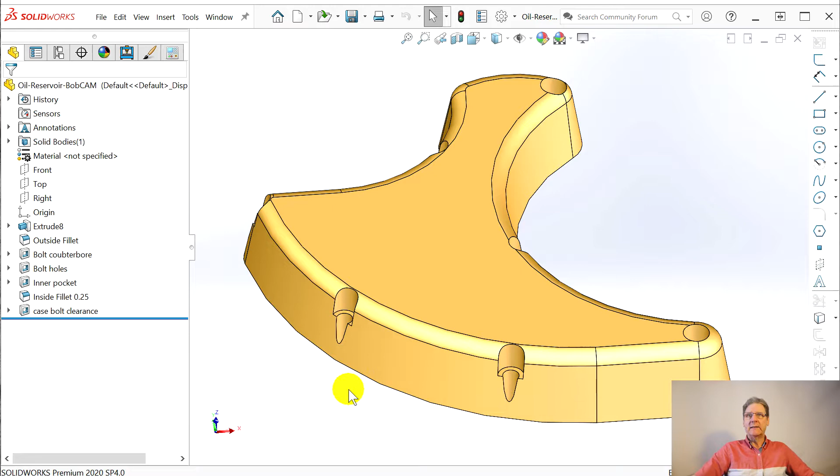And what I did is I took it and on the extrusion I put a 10-degree slope, so that there's a nice slope surface for all these good 3D toolpaths, which broke out all of these holes, but I figured let's leave those and just see. And sure enough, like any program that's trying to automatically help you with anything, it screws up BobCAD. It doesn't quite realize. It won't deal with counter bores when they're partial like this. So we'll go around that.

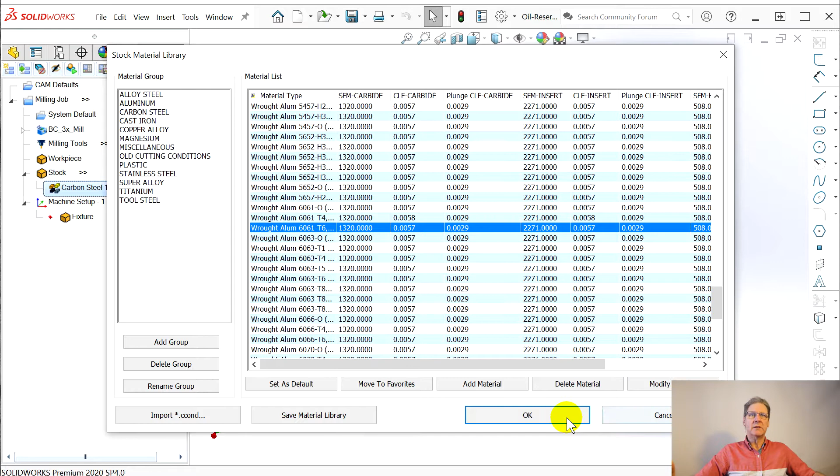Let's see, what are we going to start with? First, we'll go over to the SolidWorks tab. We'll go New Job. This is all okay. And Solid Body, what are you going to make? This thing. Stock, I noticed you can set the material right away. And it's got a pretty nice dialog box here. We want wrought 6061. And this might be a mistake because 6061, even 1.5 inches thick, is rolled in a rolling mill.

And there's a lot of stress in the top and the bottom, and when you carve that off, the part can tweak. If not 6061, there's cast alloy and various cast aluminum things made for mold making and stuff like that that don't tweak but they don't have the properties of 6061. Not that an oil reservoir needs any kind of super properties. So let's go stock wizard. I have all kinds of problems with this. So we're going to do the outside first.

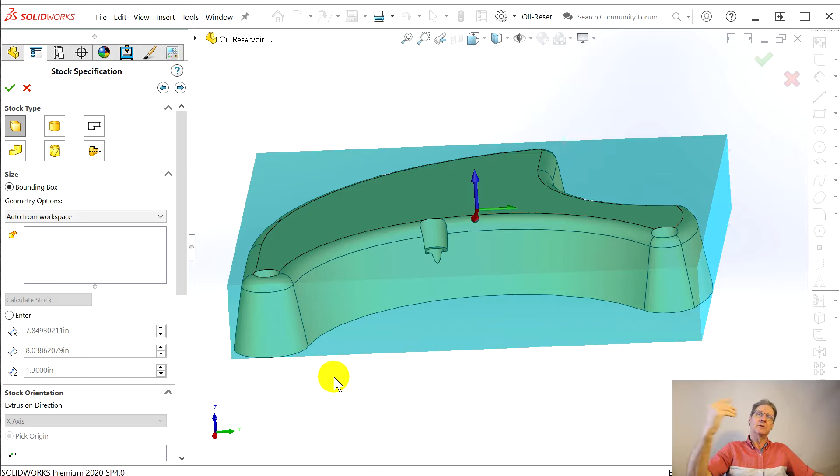One of the problems I found with BobCAD is it won't let you move setups around. You can't just drag stuff. It's like it was designed before drag and drop, before Macintosh. So you can create a new setup and then copy, paste, but then it loses all the geometry. It got to be quite clumsy. And that came about because at first I was doing the underside, this hollow part, and then the top. Now I've changed it around. We'll see if you folks agree this is the right way to do it.

Bounding box. This is given the sizes of the box, but you don't order stock like this. I'm going to order stock 8.5 by 8.5. And I'll order plate that's 1.5 inches thick. Now here's a goofy thing. It puts, let's get the icon. There's a fancy name for that. What is that? What are we trying to do? This thing.

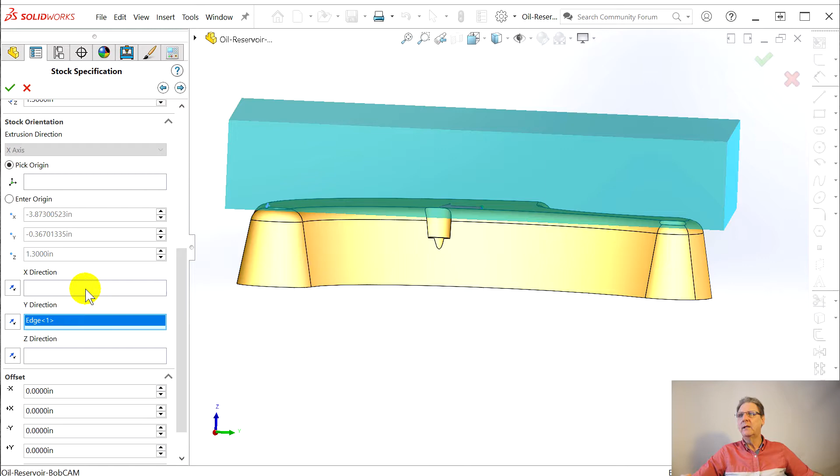Unfortunately, this can get tricky. See, the only linear thing that lined up happened to be these edges here. So if I go like that, puts Y along the right way, then here, see, this is where stuff starts going bad. Edge 1, and then I got to do Z flip, and everything goes back to normal. It freaks me out. I just don't know why getting a part 0 can be so darn complicated, right? Just leave stuff alone. And this is all the programs, right? I'm not pleased with any of them.

Okay, but it's flush here on the top, and we want a little meat. Now, I had a 1/10, but you'll see why I've decided to just put 50 thousandths on the top. When I hit enter, you'll see it jump up. See it jump, but the bottom didn't jump up. It's very confusing. So now the stock is 1.55. So you got to go here and make this 1.45. Enter, and you see it jump up.

Now it's 1.5 inch stock with the part positioned where we want it. I don't put the part 0. Well, you can't right now. Just get it oriented. I figure orient the stock with the machine the way it's going to be in the machine.

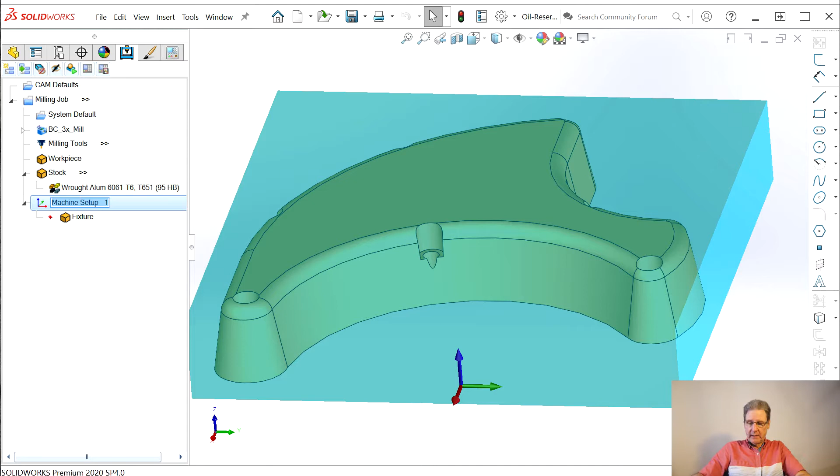Machine setup 1, let's rename it. You didn't see it at the bottom of that dialog box. And this is the outer setup. We're doing the outside of the part. Outer setup, no fixturing. So let's do mill facing. We're going to face this.

I used to just do a pocket so I didn't have to face all the material. Don't pick any geometry because you want it to do material approach. Let's see if it's smart enough to figure this out. Machine strategy, just facing. That's cool. Posting we don't care about. Rough. It's a 1/2-inch tool. I don't have 1/2-inch tools. Let's use a rough end mill.

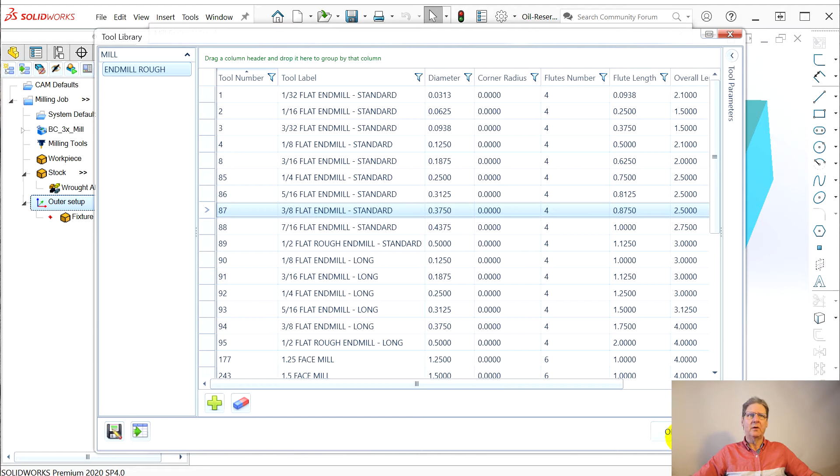And I always have trouble with this dialog, what it's doing to me. I want a 3/8-inch end mill. Okay. There it is. And you'd think, okay, we're not using the flat. Well, see, it thinks it's still using it, even though it's not. Then you go here, but I don't have a 4 flute, and I can't find a way to change it from high-speed steel. So that's kind of annoying.

It has to be longer. Let's make it 1.5. And the overall length will be at least 3 inches. And the protrusion out of the collet will be 2.5.

So 3/8. I did learn you set the units in the SolidWorks options document units. Put 4 units, and then you see all the 4 here. Otherwise, it'll pick up from SolidWorks. You'll just have 2 significant digits. I think we're okay here.

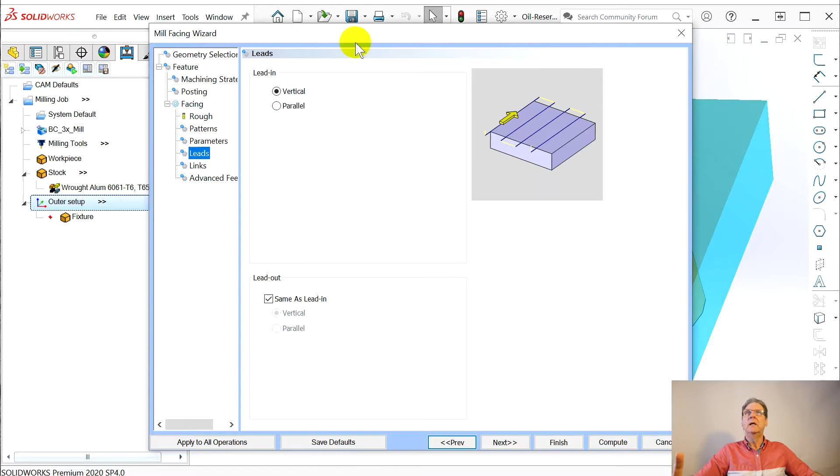Next, patterns. We want to do adaptive because I want it pretty, right? Because this is the outside of the part. And adaptive's a really cool thing that they offer. I don't think any allowance. Was there anything in patterns? I don't think so. Lead in. I'll pull it off here and hit compute. We should see it do its thing. It's got to think. It's a complicated toolpath, so this dialog comes up.

And there it is. And the reason I'm machining all of this stock is when I flip it over, I want the part and the stock to be flat on the table. Before I was pocketing this out, and you'll see why that's going to be a problem. When I break the part out, it'll fall 50 thousandths, which might just tilt it and gum up the gasket surface we're going to be doing.

But this is cool, right? We're happy. So we can go click, click, wait, click. Oh, I'm on the stock. That's what's going on. So we've blanked the toolpath, so we don't got to worry about it. So we've faced it. The next thing, I don't want to rough this in the classic sense of removing all of that stock, right? That'll be a waste. So let's just cut a perimeter around this thing, 2D perimeter.

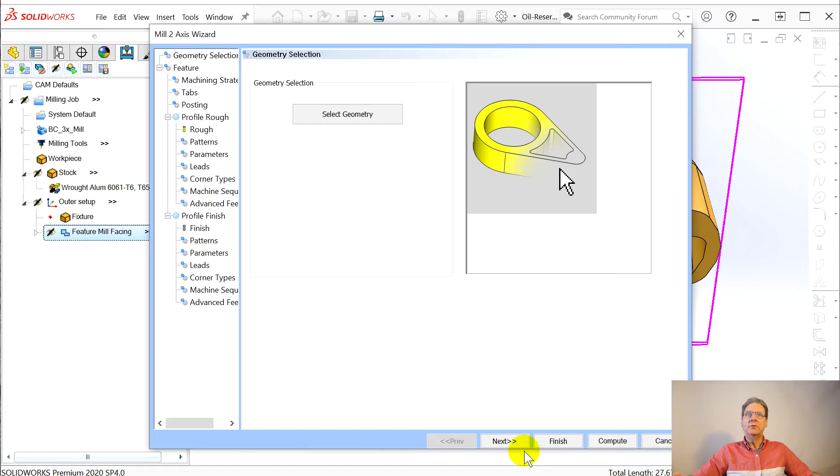Let's see, insert mill 2-axis, select a geometry, flip around. SolidWorks keeps helping you with select tangency. See, it's done blue all the way around. You say good. You do next. Let's make sure it knows what it's doing. I found this always can benefit. Won't pick faces, but pick the bottom. We want to go down to this level. I think it had it right, 1.3 something. No. Okay, so now it's right.

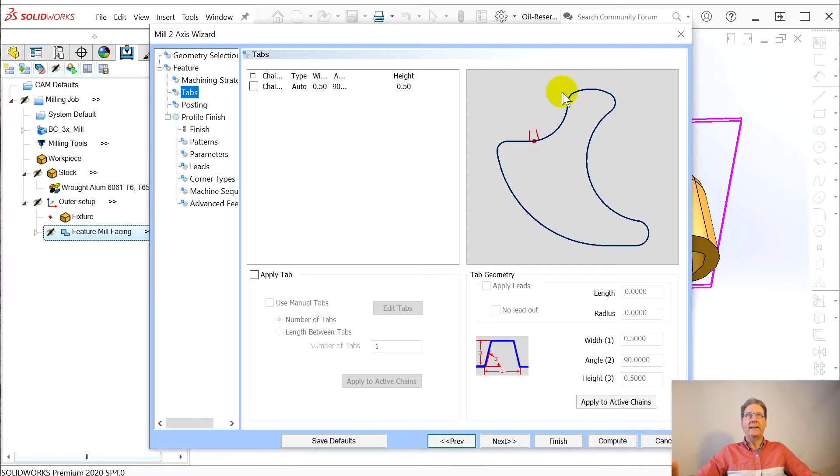So, next, do I want to do a rough profile for this? I don't think so. I think we can take the rough profile off. Just do profile finish. We'll find out. This can turn me around. See, it eliminated the finish and rough over here, and now it's just finish. This is showing if you want to add tabs around, which I'll show you later, but we don't for this operation. Next, posting, we don't care about.

Okay, wrong tool, tool crib. Flat end mill, 2 flutes. Well, now will it let us delete this stupid thing? Are you sure you want to delete this tool? Yeah, okay. So here's the 2 flute, hopefully longer, flat bottom end mill. Yeah, it's the longer one. Flood coolant, that's cool. Next. I think this is just a standard system comp left. That would probably go wrong.

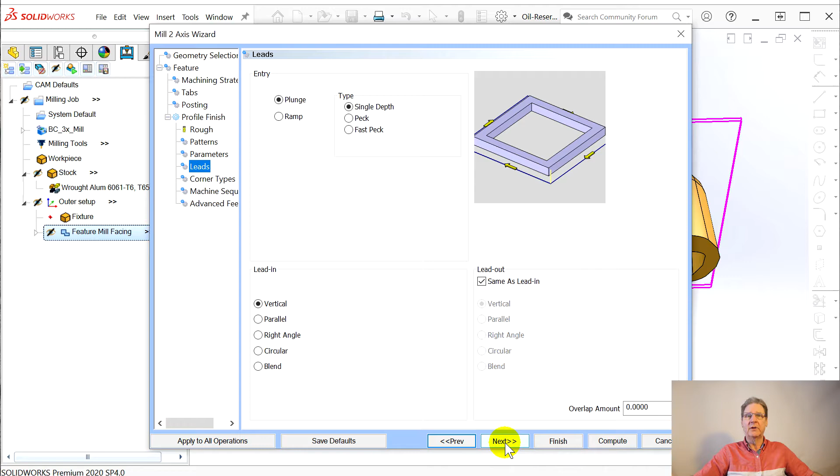No side allowances. We do want multiple steps. Let's go down .125. And then if you go back up, it's 11 cuts it's going to take. Next, leads, I think a vertical lead. I want to come down on it because really I'm doing a slot here, right? Corner types, all this stuff's cool. Compute.

Notice it put the toolpath inside, because just like MasterCam, it's not really that obvious that there's a direction. Here I've learned you go default chain and say reverse direction. See that little arrow there changed? So now when you're on the left and it's going in this direction, you will be climb milling and on the outside of the part. You can go up here and say compute all toolpaths, and there they are. Nothing on the inside, right?

Happy days. So down here, I can't see it. I'm saying rename. What is this? Perimeter. Enter. Okay. So now we've got the perimeter done.

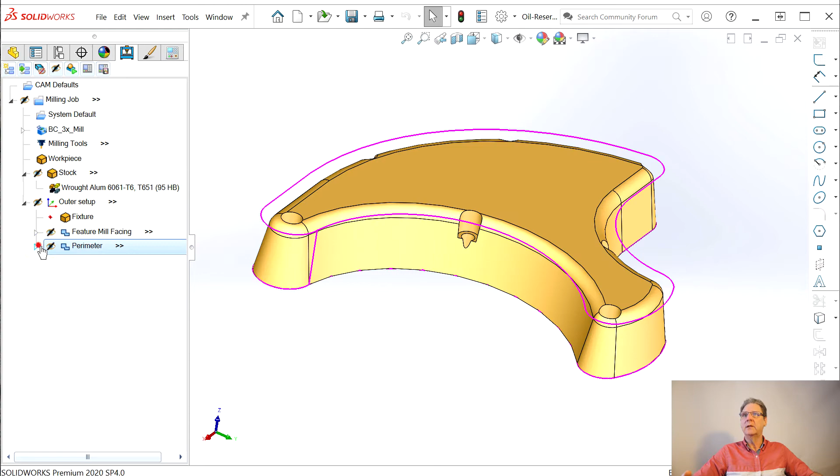So there's a big wide gap all the way around this part, but not all the way down, right? There's still going to be, I think, 150 thousandths down here at the bottom, holding this cutout part to the stock, which I assume you'll have toe clamped or bolted down to your table.

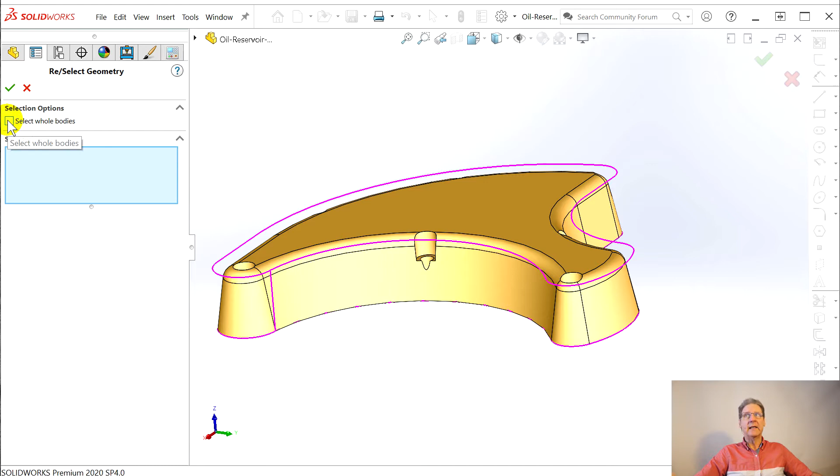Next, we're going to do a finish. It's a 3D, I may have to refer to the part that's already done. Insert 3-axis. Select the geometry - I think I said just select the whole thing. Like I say, we may have to backtrack, or I'll skip ahead.

Next, feature, top of feature. The top is going to be here. Just in case - yeah, I changed it a little.

Next, it's not roughing, because roughing would do this, right? It would carve out everything. It's Z-level finish. The roughing we can get rid of. Took me a long time to figure out what they were doing here.

And then when we click, you'll see this stuff get the right way, right? How do we do this? Up here, click here - there, now it's got itself. Z-level finish, I'm pretty sure this is the right way to do it. Work offset 1 - oh, I got to fix that.

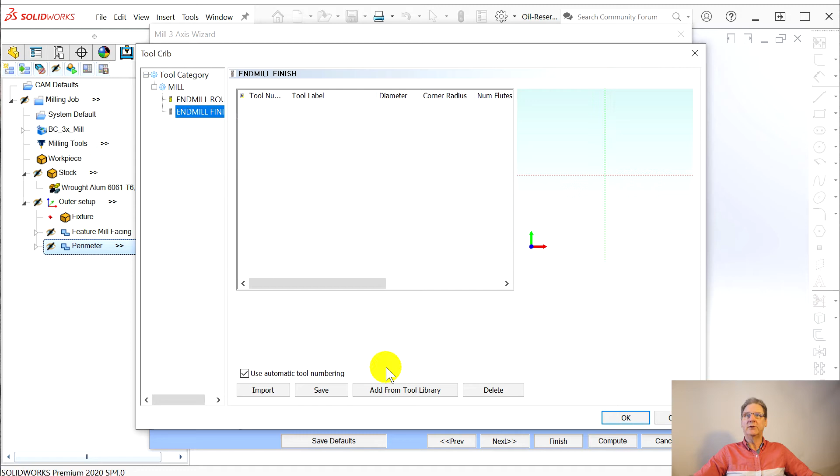Rough. Now we're going to go tool crib. We're going to go end mills finish. We're going to add from tool library a ball end mill, 1/4-inch ball now. Okay, it shows up here.

It just seems like a lot of work to get a tool. Okay, so it's a 1/4-inch, it's got the right ball. I want it deeper because it's going to be cutting deep, so I think 1.25 is what I've been doing. While we're here, let's make it 3 inches long.

Protrusion 2, that work? Yeah, I think that'll work. 2 flutes, did I get that? Tool number 2, that's smart. See, and I get confused when I go back to tool crib.

I'm not even going to do it, let's just keep moving. Patterns - climb mill, that's all the choice it's given us. Next.

Depth of cut, I want 02. I want fine cuts, no allowances. These are the tolerances - 5/10 is enough.

And this was the secret. Top of job - give it some help. The top of job is here.

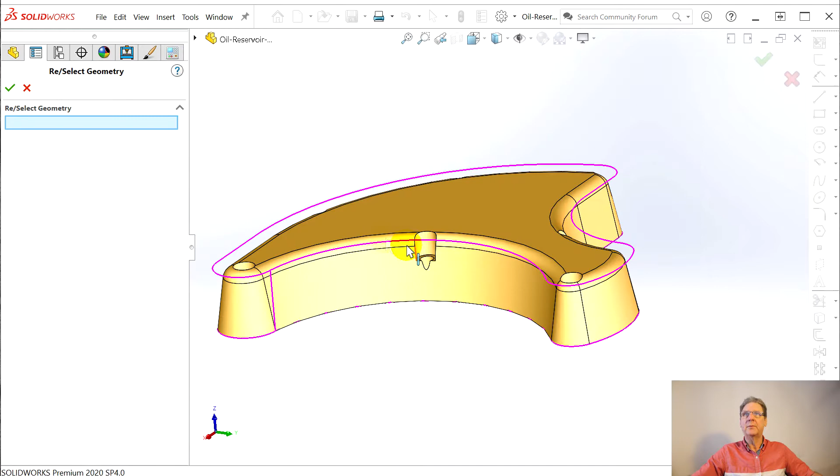Bottom of job, and this is what was tricky. Pick - so you pick here, but see that ball mill, that means the tip of the ball mill will stop in this plane, and you won't get the very bottom. Trust me, I spent a half an hour trying to figure it out.

So the bottom of the job isn't 0, it is minus 125, right? Half the diameter of that 1/4-inch ball mill, so when you put the tip of that ball down 125, the edge of that ball mill will go all the way down on that surface. Kind of hard to follow, but you'll see.

Next, leads, plunge I think - I just come down on it. Options, let's see, we only want to do the outside because it will do the inside. I couldn't figure it out on the one undercut show. Maybe I'll go back to that on my own.

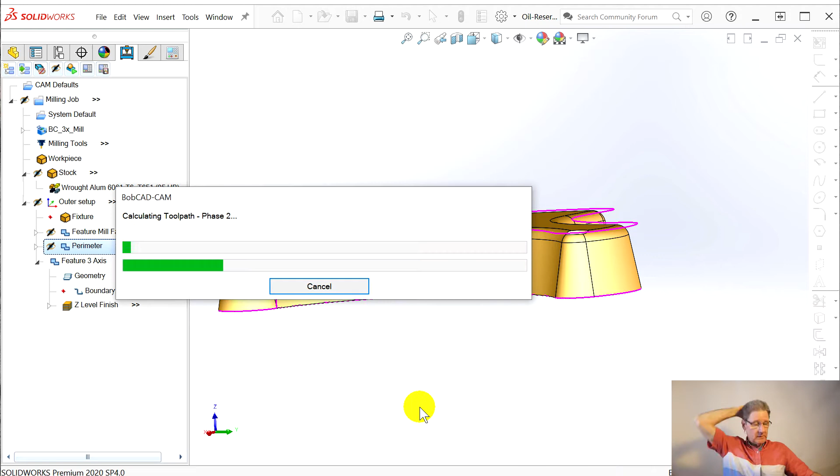Compute, let's see what it does. It's a complicated toolpath, it's got to think a lot.

I tried advanced, I tried rough first, and you see it hogging the entire stock block away - no, I don't want that. I tried Z-level, couldn't get it low enough, and I went back to advanced finish, thinking advanced. I think that's what the premium 3D package gets you, those advanced toolpaths, which are cool. They got things like 3D extents. We used those in one of the shows when we were making our test part.

My buddy Dave Rui, the mechanical engineer, industrial designer, machinist, does it all. Made that one test part just to confound CAM systems.

Because our step over is so low, it's taken a long time. But I practiced this enough. See how it went underneath? And that's why I only did 50 thousandths extra stock on top and 150 on the bottom, because you can do the math, it's 25 thousandths material.

We haven't cut this out, right? They're still going to be, even though the ball's down 125, it's still going to let us do our thing. So let's see - edit, no, rename. Sorry, you can't see that. These are the sides.

Except I like to capitalize sides. And I think you can just go like this and like this. Tuck that up. Let's do a file save.

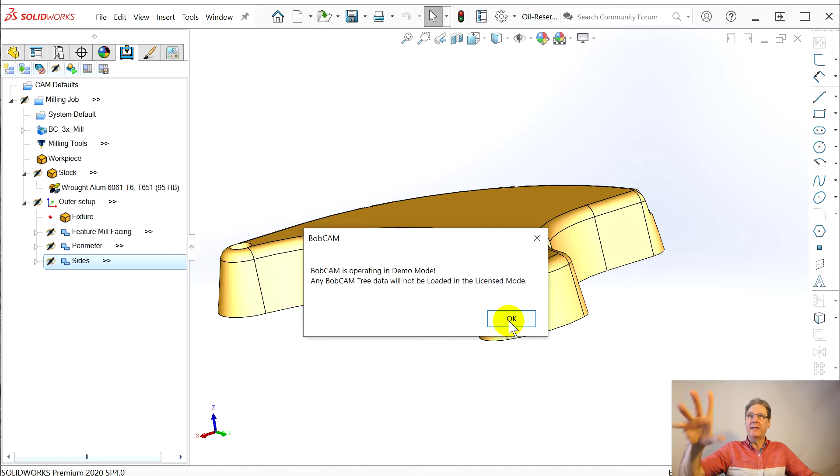No, not save as, file save. It's telling you the toolpaths will only show up in demo mode BobCAM. If you have a paid for BobCAD, the part can open, but you won't see any of the toolpaths. You won't see this job.

All right, so now what did I find? You've got a fixture in the purple. Oh, it doesn't matter. Their simulator is a ModuleWorks simulator that plugs in, which I am not thrilled by. MasterCAM uses it too, right? The expensive package and the cheap package both use the same ModuleWorks, and ModuleWorks does most of the visibility. And we make it pretty fast to run.

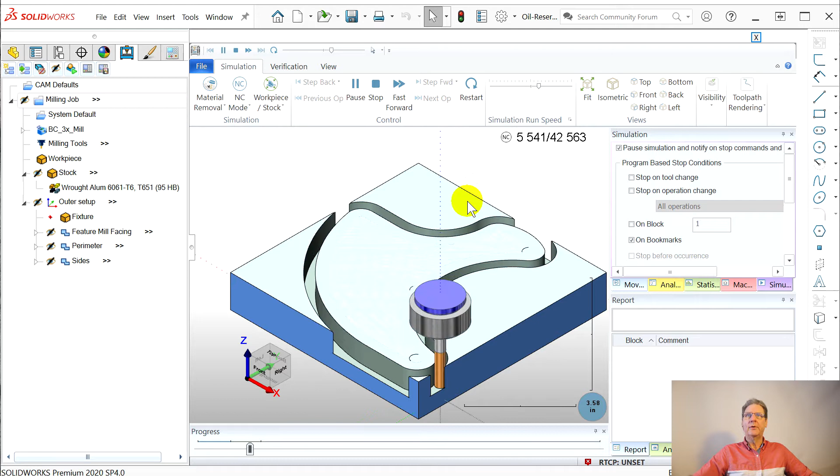So here it's doing that adaptive facing. There is the perimeter. 3/8 inch end mill. My gantry mill will take a 1/2 inch collet. And here it's going down.

Oh, now I get to show you something. I can stop this, I've learned to stop it before you quit. All of the programs, what I forgot to know is it's trying to do those. Where are we, sides? I've learned you can just do that. See, it's doing these and doing that, and trying to go inside, and doing all kinds of goofy stuff.

This is why you want your program to work in SolidWorks, because this would be a major issue. If you just got an IGES of this on a standalone MasterCAM or a standalone BobCAD or standalone anything, OneCNC, you've got a heck of a trouble trying to pave this over.

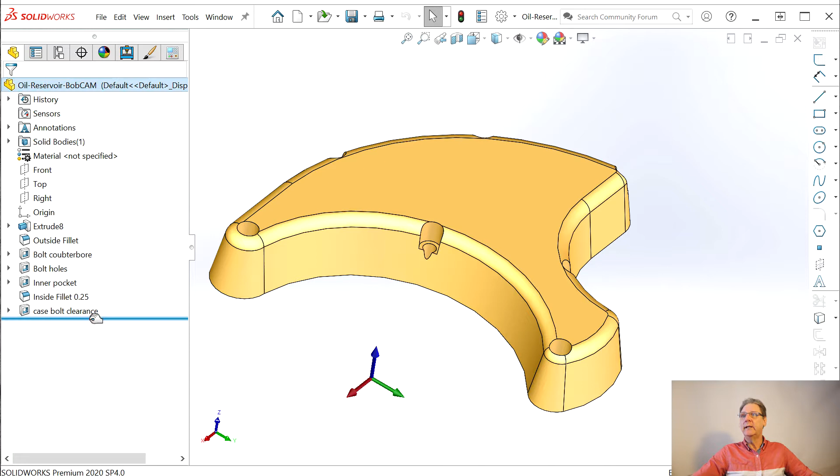So the toolpaths with SolidWorks, you take the bar, you drag it up over the bolt counter bores, you go back here. I don't know what to do here, I just say no, right? Sides, compute all toolpaths, and I'm sorry, it's going to take a while.

There's so much to remember. And this time, I didn't want to just go through the part already made. I've done that like the last show, and it's just not as satisfying as watching me struggle and suffer. Go look at them and notice, now they're just following the surface the way it is. To me, that's worth it.

I had the SolidCAM guy who doesn't have a standalone package, the sales guy. He's like, well, some companies like a cheap little computer out on the shop floor that runs MasterCAM standalone, and then you've got to use MasterCAM's CAD, which I hate. Visual Mill's CAD, the standalone, I hate.

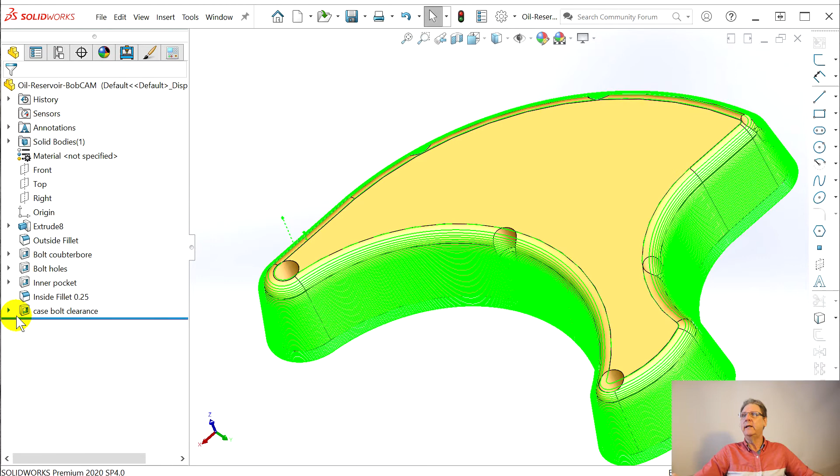Now you're in SolidWorks, look at how beautiful. Okay, so back, I say no, don't do anything, don't help me please. So that's the outer setup. Now I think you've got to go up here, you say, oh...

Promising what I don't deliver. I should have saved it, but I didn't. Let's hope it's stable. I've had a couple crashes, always doing something goofy, like having the simulator run and then crash out of it. And now let's just go fast forward.

And let's go visibility, there, it's done. Visibility, oops, God it's so clumsy. And now you can see, because we defined that depth and added a little to the depth, now this corner of the ball mill gets down to this black line, which is the part. And then the tip of the ball mill, going down 125 extra, goes here.

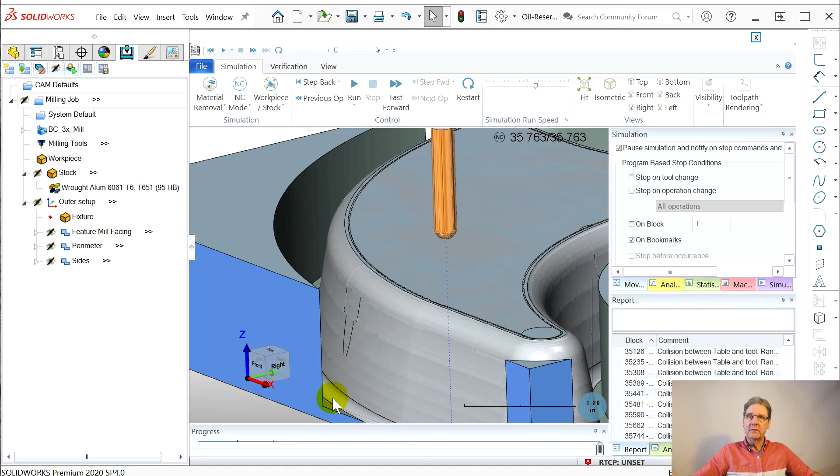But I've left enough material, if I section this, you'd be able to see there's still 25 thousandths holding this part to here. And like I said, I used to just pocket this and flip it up. But I was afraid when I cut the gasket surface last thing, when the part falls, if it falls one way, then it's going to damage the gasket surface. Worst place you'd want to do it.

So let's get out of here, do what we forgot, which is file, save. Yes, we know it's demo mode. Thank you. Now we go milling job.

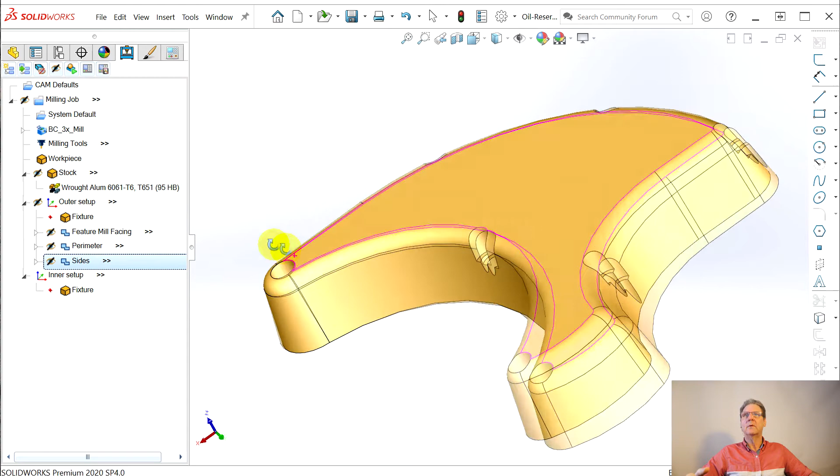Add a setup. I like the way they just pop a new setup. Rename machine setup, this is going to be inner setup here. I'll look at outer setup, inner setup. I can't remember if we're on this outer setup.

Let's edit it. No, I didn't put the part 0 in the right spot. Good gosh, origin here, no wonder it was so goofy.

And same problem, but now see, you can say y-axis and pick the stock, and then flip it, and then flip the z, there it is. So that's why it was giving me goofy numbers about depths and that, because the part 0 was down here.

I want to find this top corner on the stock. So you say, okay, great. Now we're going to go back and drain this one.

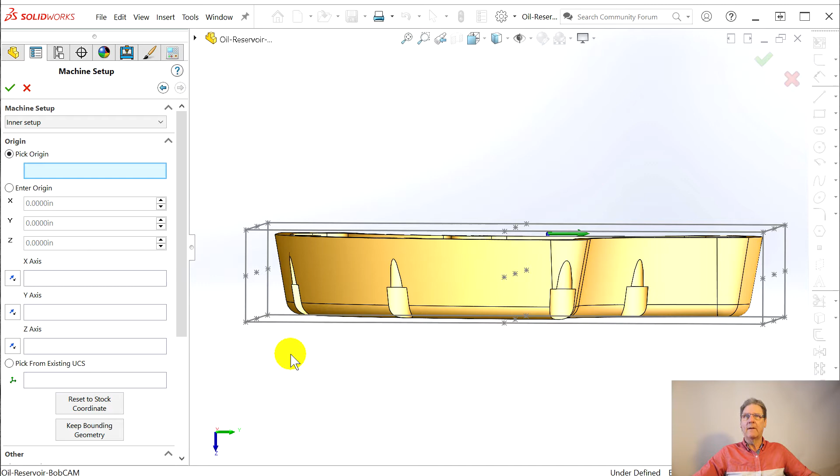This is why I like doing it real time, it can show you all the goofy things you've got to deal with. Okay, so now we're going to flip it around in the vise like this. And see, part 0 isn't on the stock anymore. I wonder if we can do this, because we've faced this stock off.

I'm thinking, what if we chose... no, you can't do that. You got to find this. Well, it's got to be up here, and I'm going to have to do part 0 up there as well. I'm going to have to change that part 0. Flip it, flip Y, and then flip Z. There we go.

Ignore all this part 0 stuff I'm suffering with, okay? Because setting the part 0 to the corner of the stock both times means the thickness of the stock will change the thickness of the part. Can't have that. So I gotta fix it now while we're fresh in our minds.

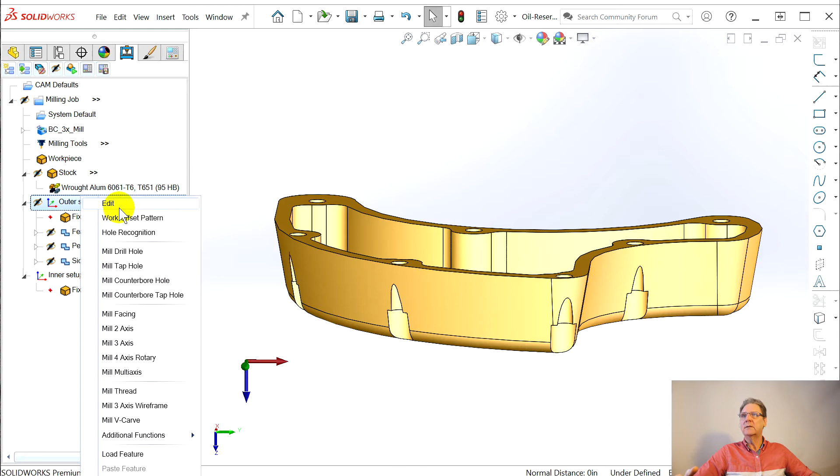Edit this. So our part 0 was here before. So if we put it on that exact same spot, here, it's going to be a little harder to find that corner, and it's on the movable jaw of the vise, which I'm not thrilled about, but it's the same physical point.

Now the part, because the stock variance won't matter, right? So you're not finding the top corner in the back, you're finding the bottom corner in the front. Not quite cool guy stuff, but hopefully it's all going to work out.

Next, say okay. Inner setup. Okay, it's nice. One of the things I hate about the simulator is it uses different mouse buttons to navigate, to rotate and pan. I like the pan function better than control middle button like SolidWorks, but still.

Now, how did I start this? Did I face it? No, I roughed the inner. I'm going to come back and do these holes, but I figure it's a 3D show. Let's stick with the 3D.

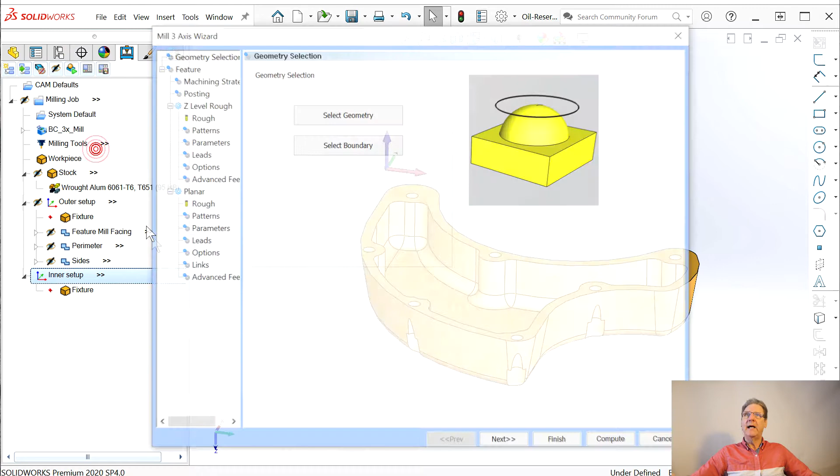Mill 3 axis. I think I can just select... I'm sorry, go here, clear the selection, select the whole part. I think I got away with this. So we got the geometry selected. Next, all this stuff hopefully is correct.

Here's the strategy. Z level rough, but we don't want to do planar afterwards. Z level rough, okay? Next. Don't care about this, the roughing, it's that same mill. Pocket in, pocket out. Might be pocket out better.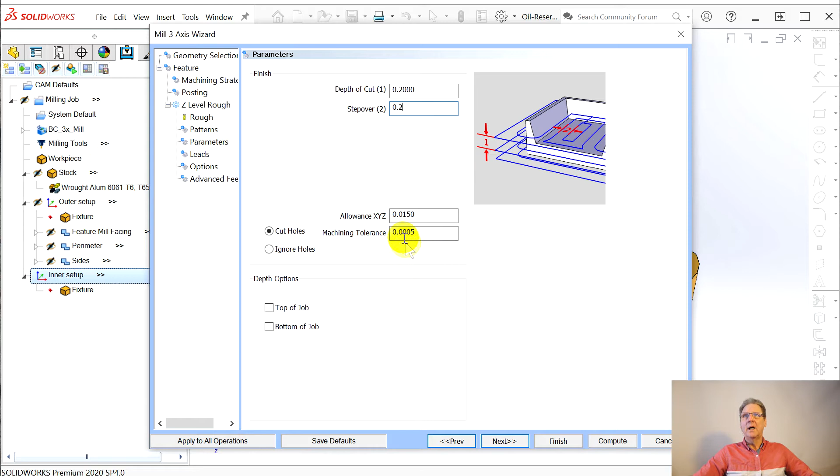Parameters. It's going to go tenths. Let's go 2/10, just so there's fewer tool paths. No allowances. Let's cut it true.

Cut holes. Depth options. This has always helped me. Every time I use this to help define things, the bottom of the job, pick - first time I saw this, go just pick how deep. That was Visual Mill. Leads, okay, options.

This you got to do inner only. Otherwise it'll go and try to do the backside. And I think we can go compute. It's going to think, and we should see it roughing out the inside.

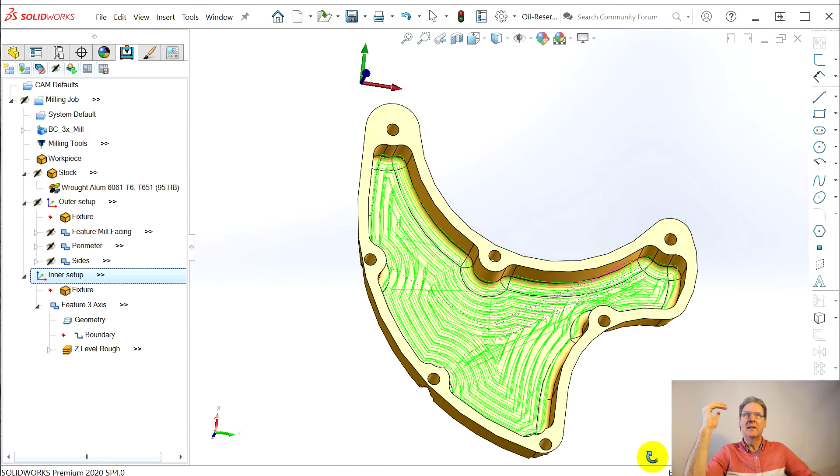It's fairly complicated, right? It's got solids. There we go, right? It hasn't climbed up on this surface like it might if we let it go nuts, right? Hasn't done all the stock. And let's just be happy with that path.

Okay, so here, now you can see it. Rename. This is inner rough. Okay, good. Do we hide everything? What was that? Oh, I changed all the toolpaths when I changed the origin.

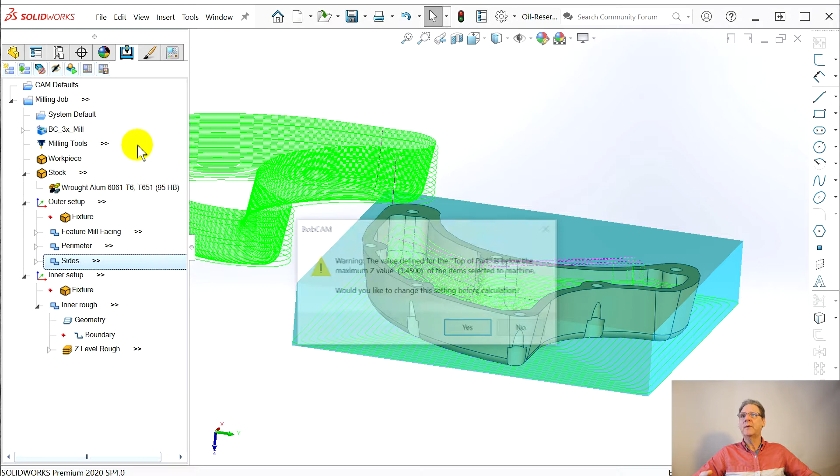Compute toolpaths. Compute all toolpaths. Good thing we checked. Compute all toolpaths. This is where we should see this disappear. Where are we? Compute all toolpaths.

Yeah, we know about that. That's just a warning that you're sending the tool below the part. Oh, but now we've unsuppressed the things. See, I wanted to do all these mistakes. I'm sorry if this is exasperating to you folks, but I've been going through this for 2 days trying to figure out a good way to do this part.

And it's always like this back and forth. It's like I read a book once about writing, right? Because I'm a professional technical writer. It said they shouldn't call it writing, they should call it editing. Because what you're constantly doing is rereading and rewriting and rechanging and fixing all the screw ups.

So this is a complicated toolpath, so it's right. The perimeter, didn't I say compute all toolpaths? Okay, let's blank everything.

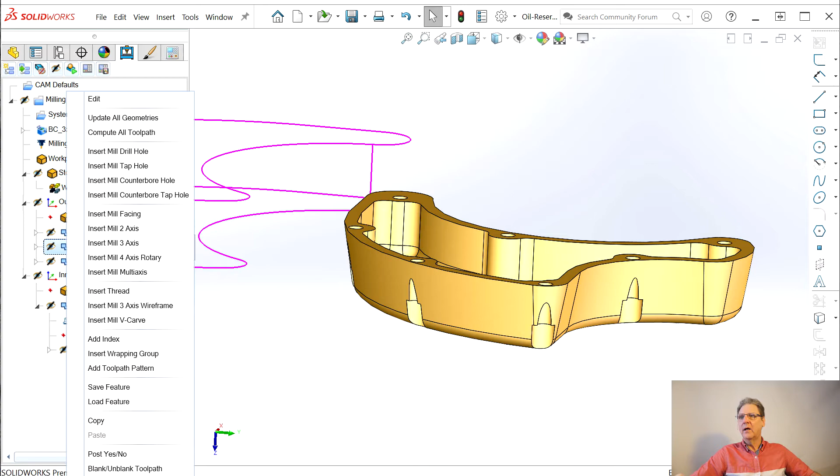Unblank toolpath? Okay, something's wrong. We did say, come on, darn it. Compute the toolpath. It doesn't want to change. Geometry, reselect. Let's do this.

Let's do clear selections. Select tangency. Thank you, SolidWorks. Go OK. Perimeter. Compute all toolpaths. It's done it on the wrong side because this is software. Reverse direction. Perimeter. Compute all toolpaths.

Did I say update geometries? I'm not sure. Okay, now this part's looking right. Sorry to be a space case. It's half hour already. Okay, inner rough. We got the inner rough. Now we want to do these radiuses.

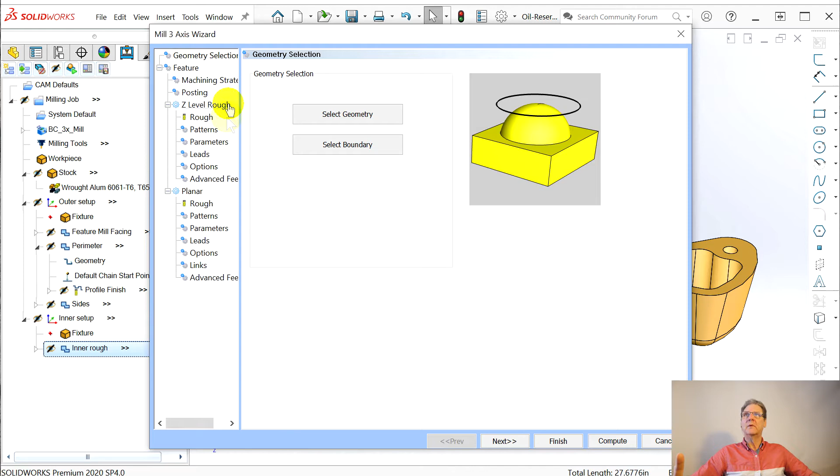This was a little tricky. Some of the things that took some time. It was select the geometry. Here.

At first, all we're trying to do is round this off down at the bottom, put this fillet in, because even though it's on the inside of this oil reservoir, I'll know it's there, and I want the part made to print. I assume you will too. So at first, I just did the fillets like this all the way around, and the tool would gouge the heck out of it because it would put the tip of the tool on the edge. So by going up here, it helps this thing know we don't want it to treat the top edge of this fillet as the center of the tool, which is what it was doing.

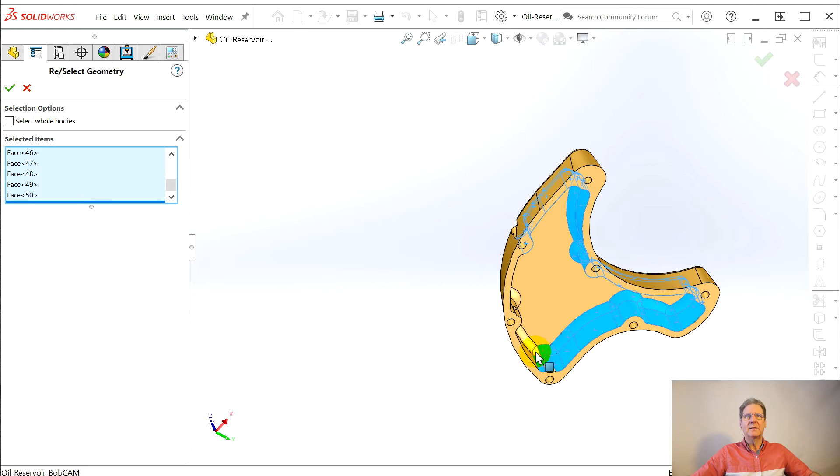A little bit of time. And that's the other thing about this simulator. Something looked a little off. Why are there 2 lines in the gasket surface? What is that? Well, that's because of the way they show the stock. You start playing around suppressing stock, and you can finally figure out you left all this meat.

Not as clean as SolidCAM. Oh, see, it left a couple off. Always good to kind of look and see. All right, so we're going to do these radiuses. We say okay, it's happy. Then next.

I'm not so worried about here. I think it was just Z-level finish, so the rough can come off, the planar can come off. You go next.

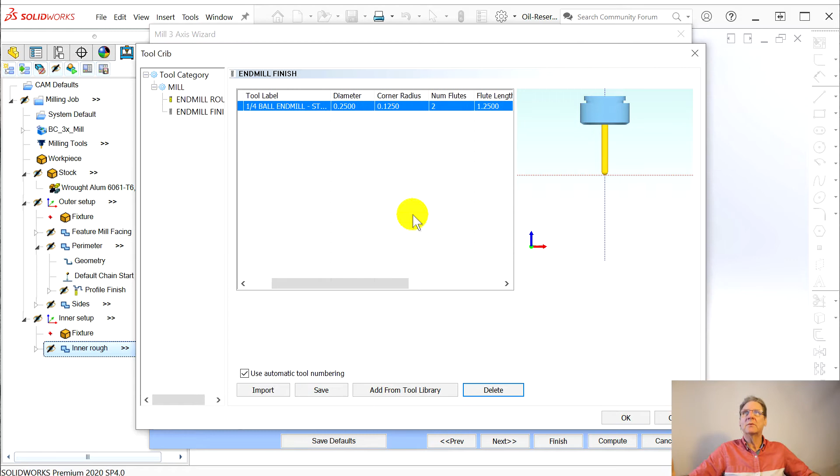It's not rough, it's tool crib, finish end mill, our 2 flute. Why is there 2 of them? Is this one unused? Yes, okay, tool number 3 we don't want, but we do want this one. So there's our longer one, so the flutes don't touch the side as it's spinning.

Next, climb mill, absolutely. Depth of cut, same thing. We want pretty fine, let's do 20 thousandths. No allowance, it's a finish.

Top of job, pick. Now this is where it gets cool. You pick that. Bottom of job, pick. I didn't do this once and it didn't hog it down quite right. Okay, next.

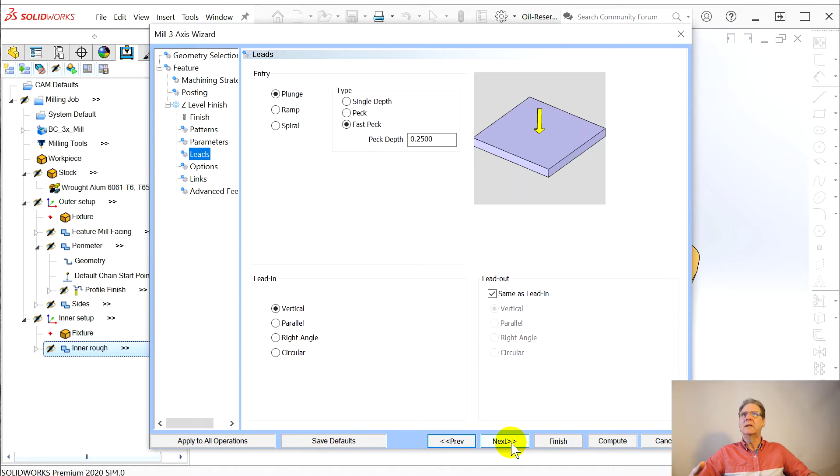Leads, just, I think plunge works. Options, let's see, what are we? We're on the inside of this, right? Just do the inside, it tries to help and do both sides of the surface. I think we can compute.

This is going to be another thoughtful one where it's going to take a while. And if I did it right, which may or may not be true, we'll see. We shall see. Yes, I did it right.

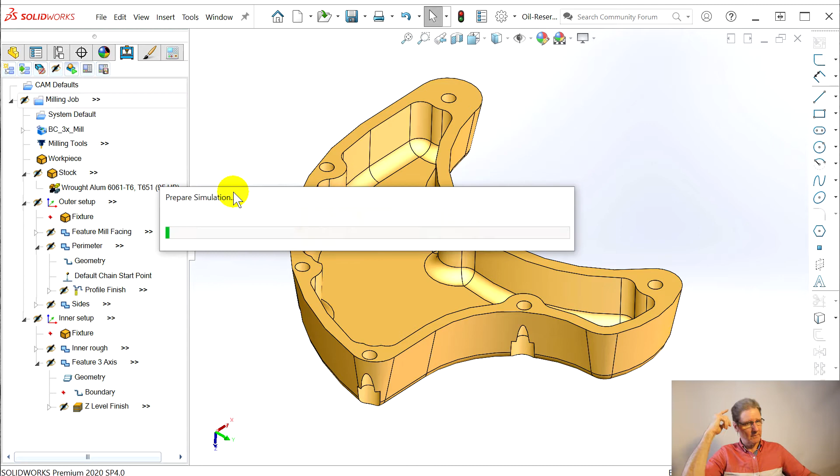So that kind of concludes the 3D. I'm going to come back and show you how to do these holes just so we have a finished part, right? That'll be cool. But meanwhile, click, hide everything. Do a file save, because when this thing crashed on the fixture show, it crashed going into the simulator. So just in case, and I should tell you, window, does this work yet?

Not yet, the simulator's got to do its thing. Does a lot of thinking. Oil reservoir, BobCAD, solid part. Okay, so visibility, hide those darn tool paths. Just go to the finish so you can see what's going on.

And well, actually, see, all collisions, I didn't do the work offsets. Come on. It shouldn't be breaking out here. I'm a little confused. Maybe that perimeter I didn't do right.

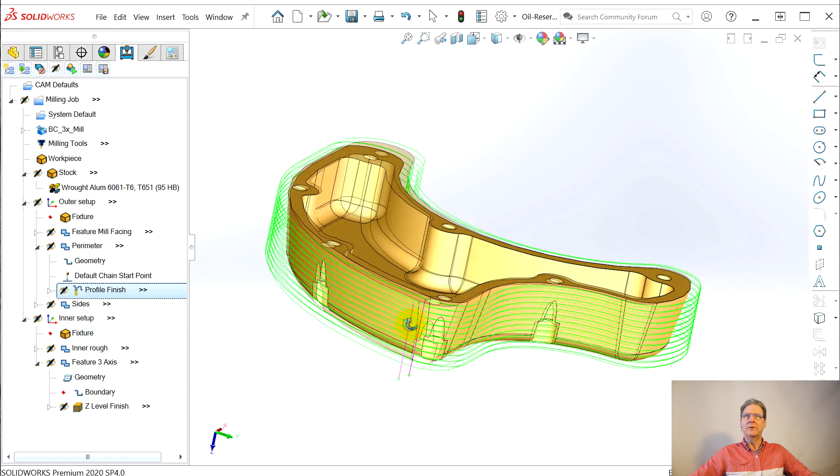All right, like I say, I like showing all the grief. No, perimeter just comes down to the right spot. The sides, I didn't change that. Z-level finish - oh, that's what's wrong.

If it wasn't for the simulator... Now I'm worried I got them all screwed up. Okay, edit the Z-level finish. What is it, patterns? Where do you say parameters? Pick the top of the job.

What are we doing, is this the outside? I think we're going here. Yes. Pick the bottom of the job here. Yes. And then this is where I said 275, I guess, would be 275, right? Now compute.

And okay, we know about this, this is no worry. It's just saying wait a minute, we know where the part ends in physical space, and you're driving this tool below that, when I put that negative number. There's a lot of back and forth.

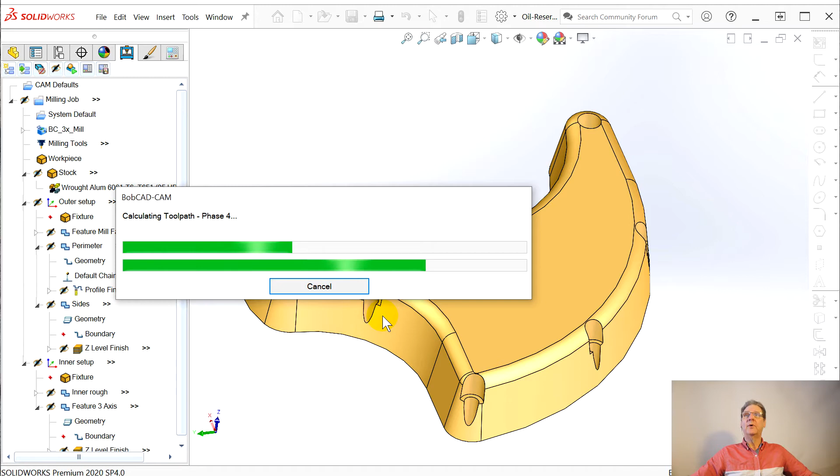And of course, when I designed the part real time, all the different tool paths, all the different operations, all the different back and forth, there was a lot of back and forth. Oh, and I'm screwed up again. Cancel it.

Outside fillet. Now go back here. No. And where are we? Not perimeter, sides. Compute all tool paths. No, that was just saying you want to change something. I've learned all the ways this can screw you. Compute, excuse my language, compute all tool paths.

No, don't do anything. Just do your thing. I'm not going to go and change. That's what it's asking you. Yes, okay, now go change the numbers. They don't tell you that they expect you to go change the numbers. It's just, yeah, okay, we're not going to do anything now because you said the word yes.

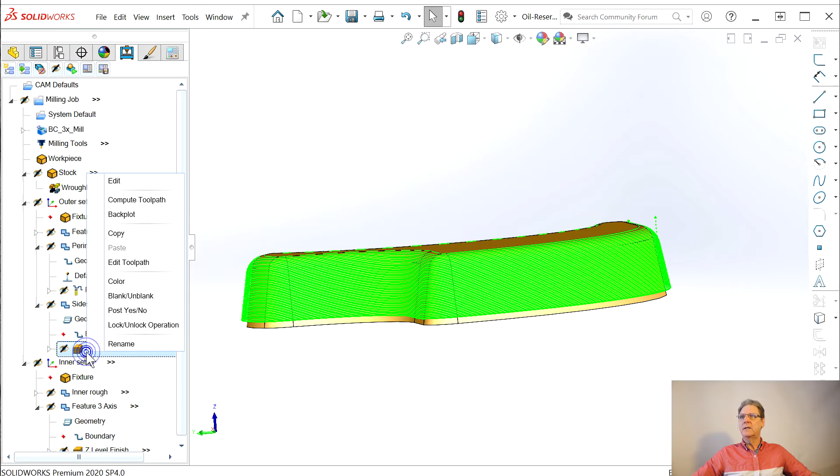And let's look at them. And did I go in the wrong direction? I must have. Z-level finish. Well, let's see if I can edit directly. Parameters. Wait a minute. Pick here.

You can see I changed in part zeros. What do I want to do? I want to go down .125, so I think that leaves .025 is the number we're trying for, okay? And we say compute, and no, don't stop doing stuff for me.

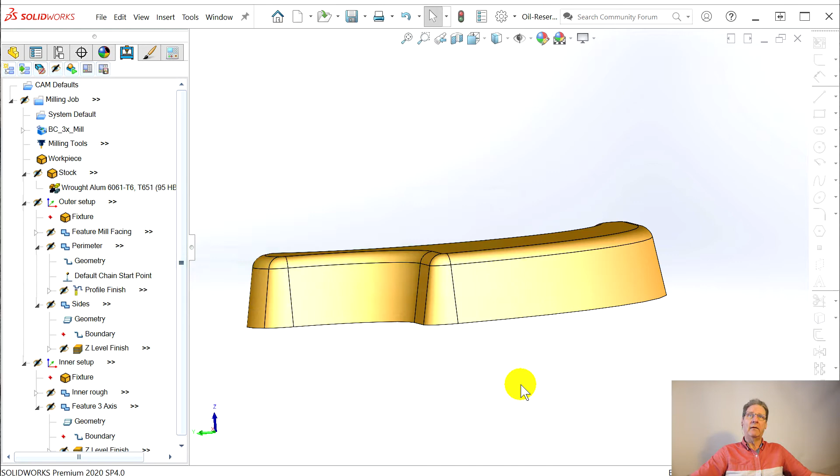30, actually we're not in too bad a shape, 35 minutes. It'll take a while to put these holes in. So you can tune out after we get this guy right. Oh, and we got to go look at it, Z level finish. Now it's doing what we want. You know, going .125 below the level of the part.

Up here, turn everything on, turn everything off. File, save. Yeah, we know it's a demo. Simulator. You get a rhythm, you know, it's like playing in a drum circle with a bunch of hippies. Visibility every single time. They must figure, well, he wants to decide every single time. Toolpath, just run this out. I kind of know what I'm looking for, because of all the problems I found figuring this out.

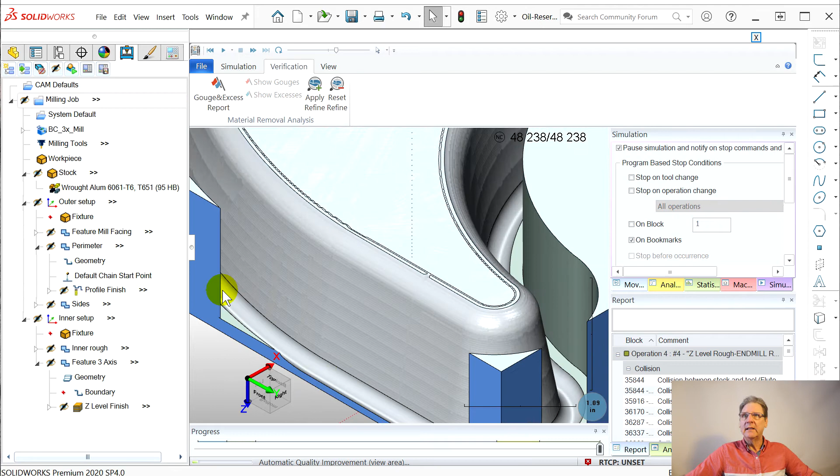Like I said, advanced rough. Okay, now it's acting the way I want. It leaves this wall. This corner here is the edge, like before. Let's look at what we did to ourselves here. Okay. It is not, however, I'm not sure what it's doing. Z level finish. Okay. Let's get out of this and see what we did to ourselves.

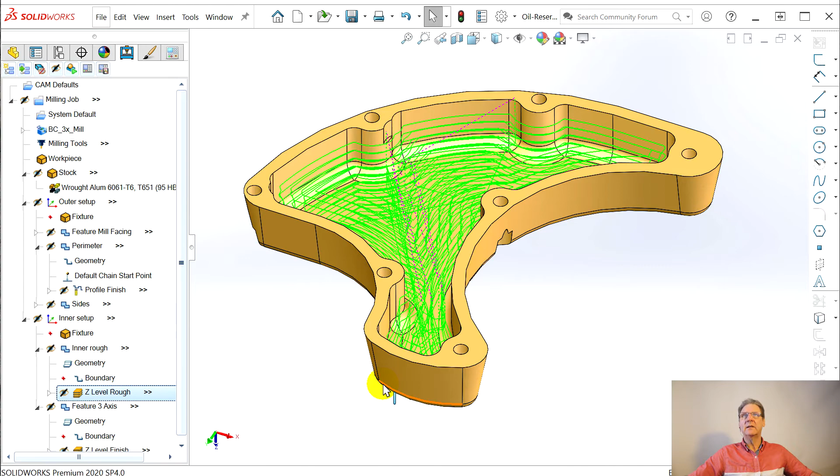Oh, duh. Okay, our toolpaths are there. I guess it was hogged out underneath. Although you think everything would have worked anyway. Let me look. Go back to BobCAD. No, don't do anything. Inner rough. Is that all dialed in? Yep. Okay. Once again, file, save.

I'm kind of glad you're seeing me flail, so that way you won't feel so bad when you flail around with all this 3D, with all these programs, right? I like the ease of use of Visual Mill, but then they kind of complicate things when you get their dialog box up. There's these 2 rows of tabs the way Microsoft does. God, I hate it. So you pick one of the upper, then everything moves down, and then they change. Sometimes advanced cut parameters is here, sometimes it's over there.

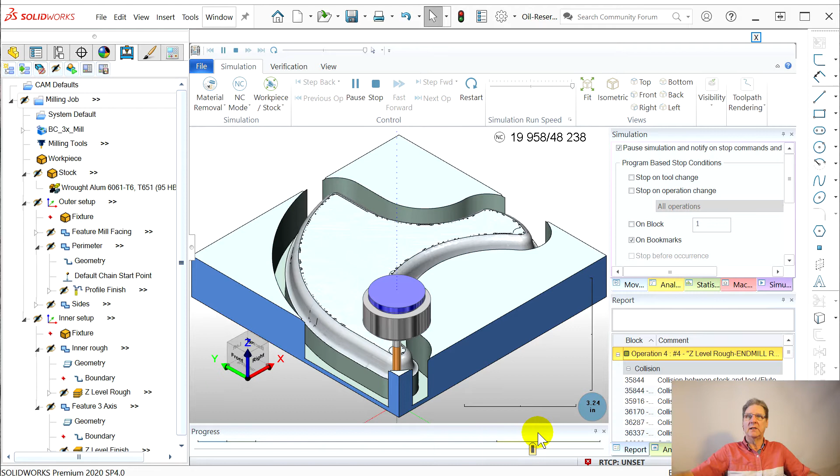Every time, no toolpath visibility, fast forward. Oh, by the way, you can see down here, this slider is telling you how far it's doing its thing. We got all these table collisions. I'll show you how to fix that next. And now it's the way we want on the, oops, too far, on the inside, right? Monotonic coming off of this flat, coming up here. All of this is math errors or rounding errors in the ModuleWorks module.

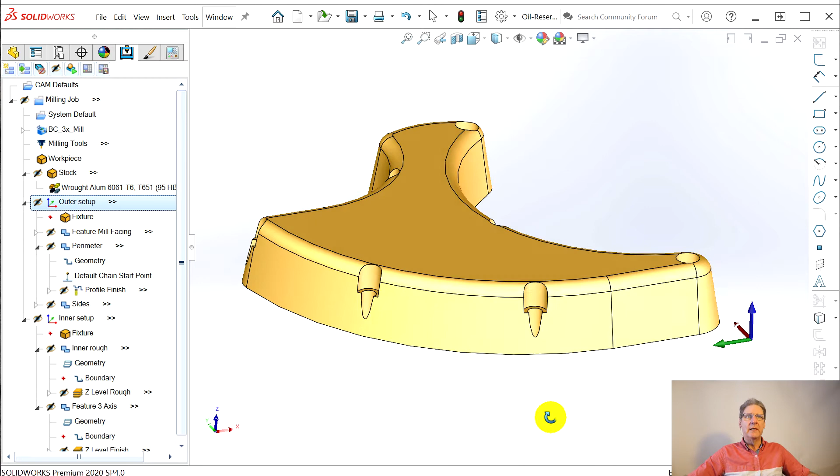Let's get out of it. Let's fix our outer setup. Oh, see, because I'm used to the simulator, I start using my right hand to try to rotate my left finger to try to rotate stuff. Outer setup. It is down here. Edit.

It's saying it's crashing into the table. And so you got to raise the thing up off of the table. Why it jumps to that number, I don't know. Let's go a half an inch up here. Then the inner setup. Now we got to go up, edit, work offset of at least 1.6 to get it up off of the table.

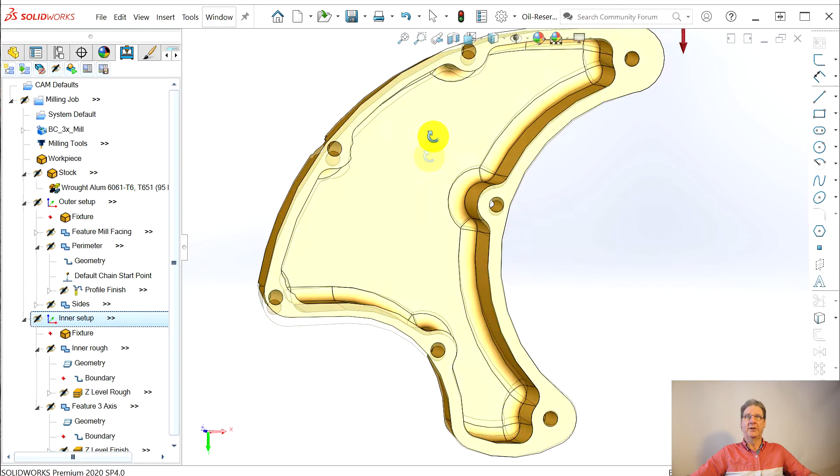I'll show you. There's a video actually. Enough people have trouble with this kind of crashing into the table. What table? There is no table. Well, you're not looking at the right simulator view. Let me think. Save. Yes, save everything. Let's see if we fixed anything. Simulate.

See, I don't like to see the part workpiece moving around, but they're all proud of their machine simulation, which you get to, where is it? Here. So you go here, and there's the machine. And now if I did things right, see, because I did a half inch, we're up off. Of course, they're different. I should have made it 1/10 of an inch up because I think the other one is going to end up 1/10 of an inch. So that's kind of scary.

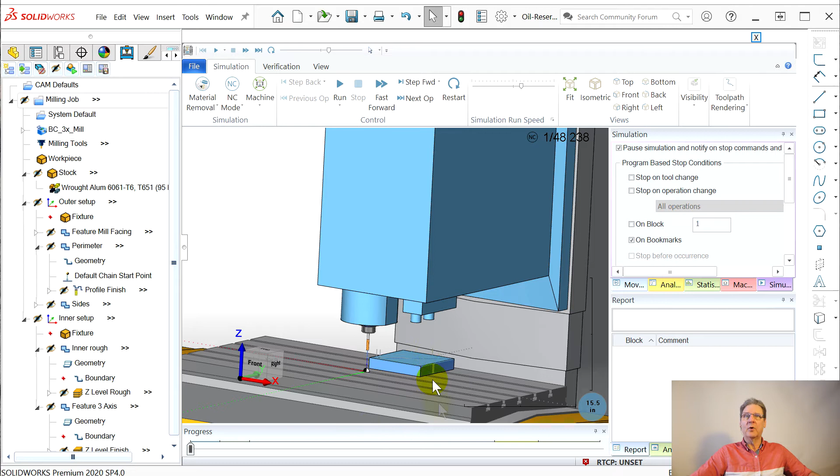But getting this workpiece, otherwise they put the part zero flush with this surface here of the tool table. But we don't like looking at that. Let's see if over here any more crashes come. Probably will be. There was always one when I left the part, something in the roughing. Here, stock and tool.

In the Z level rough. And that's going to take forever to go real slow and see where it pops up. I'll do that on my time. But, oh yeah, see why I disabled the toolpath. So, that's that.

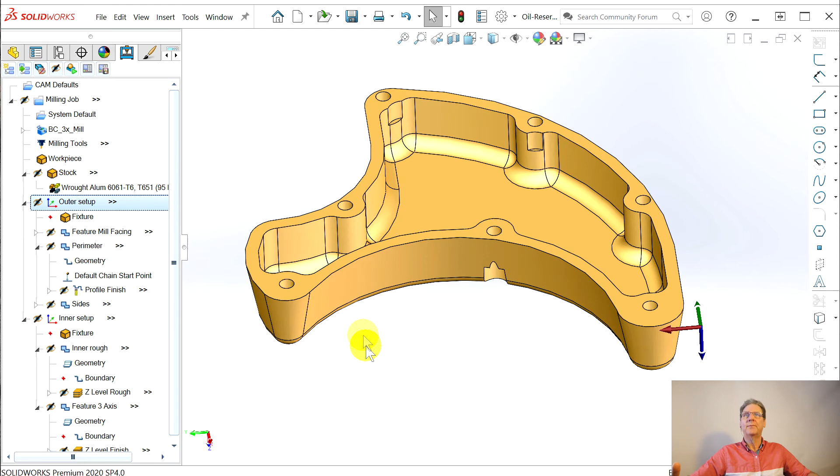So now, you tune out now if you had enough 3D. We're 40 minutes into this, but I did learn, don't show me the stock. See, I'm using the wrong buttons because the simulator uses different mouse controls. Why would they do that to their fellow human beings?

All right, so, oh no, we're not actually quite done yet. I haven't cut the part free, have I? Inner setup, outer setup, stock, close that up. So here, where do we go? Z level finish. God, I get so, they're little flyouts. Programmers, don't you love it?

Insert mill 2-axis. Select the geometry. We want to cut the perimeter of this part. And say select tangency. It's gone all the way around. We say fine. We go here and pick top. Let's pick the top. Well, I don't know where the top is. It's top of the stock. Let's hope that's right. Pick bottom. Here. Let's see if it changes. No. Okay. So this thing's pretty smart. Of course, that's where the geometry was.

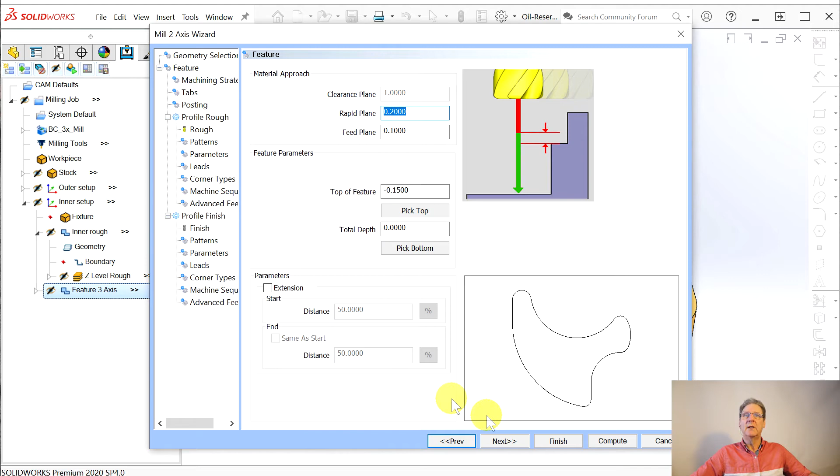Next, what we want to do is profile rough because we're going to need to make several passes. Next. It's using that end mill we want. Patterns. Now you got to know to go side roughing. Step over. Take 3 passes. Oh, there's something you're going to get a kick out of. And I think here I said, well, step over 250.

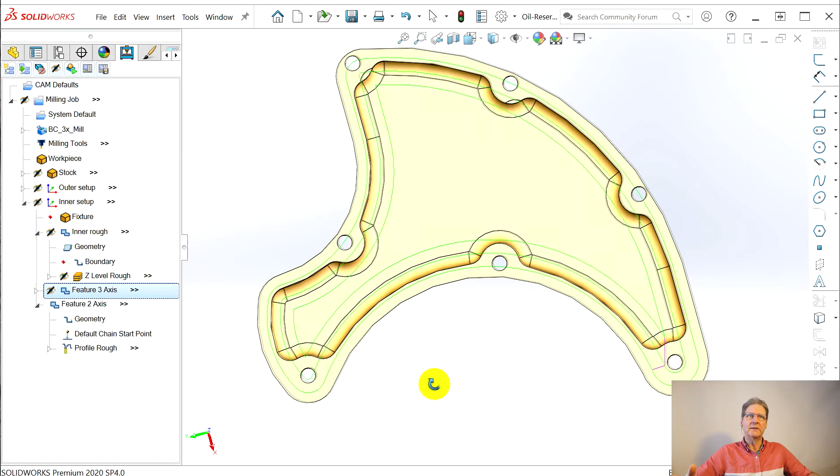Zig, yeah. Left, yeah. Machine compensation. We'll figure we're starting to understand all the goofiness here. No side allowance. It's a roughing operation. They always want to leave stock. Let me think. No, it'll be okay a single step, I think. Entries. Usually by the time you get down here, you just say compute. And it's actually done it on the right side this time. But watch, it might leave a little sliver of material right here. This is going to be entertaining.

But you can see as it comes out, as soon as it gets to this edge, now the trick, after you rename this to gasket surface, bang, and edit it. And I think patterns or parameters. The side allowance. If you have a positive side allowance, it leaves stock. If you do a negative, minus 0.375. Let's try that. Compute.

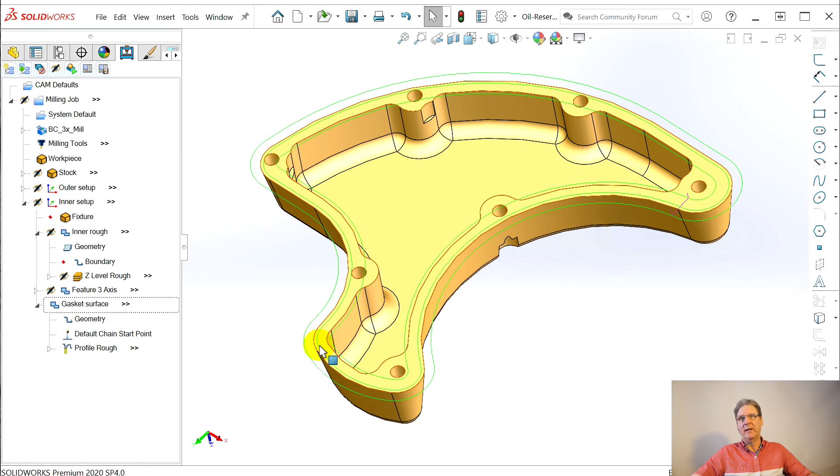See how it's gone out here? So now you're sure you're going to cut it free. It should cut free pretty quick, right? As soon as you go to this edge. But that might be a good way to do it. You can play around with that. So that's that. I can show you. Let me see.

File. Save. I don't know why I get spaced out towards the end of the show. Simulate. And now it will be cut free on purpose, unlike that one problem area we had. Nothing works. You got to wait a while. Flash, flash, flash, all this stuff. There. Oh, it remembered. Now it's thinking again. Okay, toolpath gone. Fast forward.

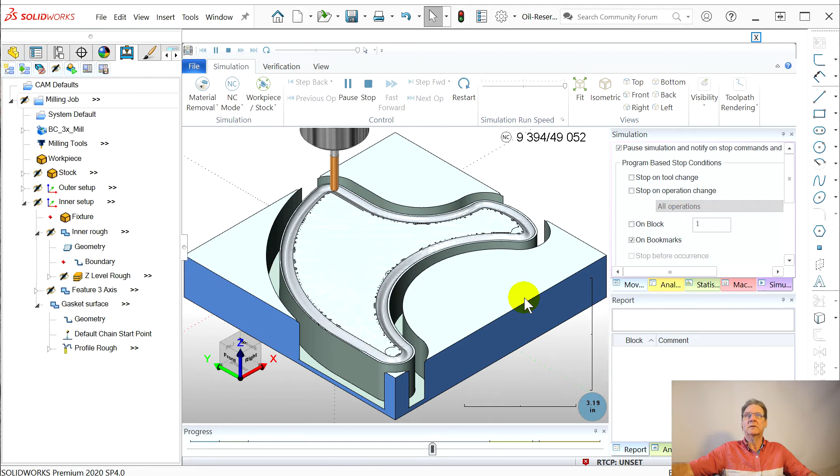And like I say, you should run it at speed at least once so you can be sure. And you might want to do step overs here. The real machinists. I'm just learning this stuff. See how it left material here? That's worse than before. Okay, well. The 3D portion of the show is over.

Edit. First, did I use the right tool? Yes. The parameters. Oh, I did all this side allowance. Let's use a small negative side allowance. We only need to go 250. And where is this? Step overs. Let's do, it worked once. No, let's go back to the way it was. I hate to be spacey on you.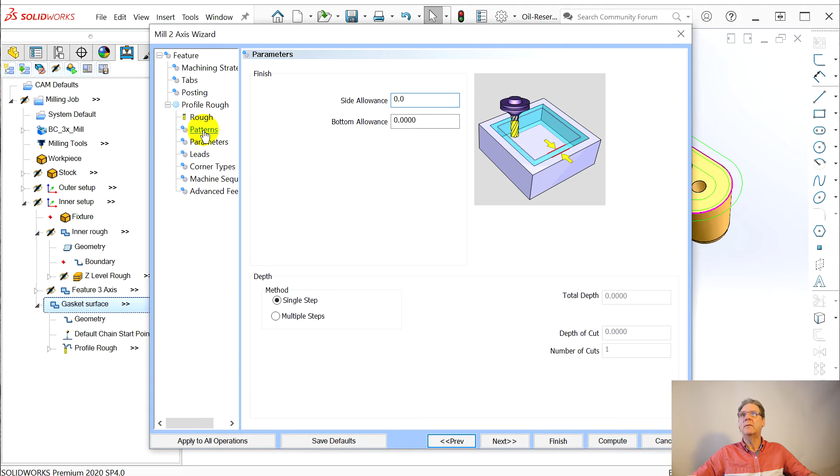I think I left 0.01 at one time. Do I want to do it this way? No, let's go 0. Sorry to be thinking real time on you. Patterns. Step over 3 passes. Now let's compute. There it is. Now. See, one of the problems is the simulator, it's all or nothing. At least I haven't found the way.

No, you should have a stock in progress, and at some point, when I say simulate, all that's calculated, it's memorized, the way SolidCAM works. Fast forward. Come on. Oh, it's still thinking. I'm turning it there. Now we're done.

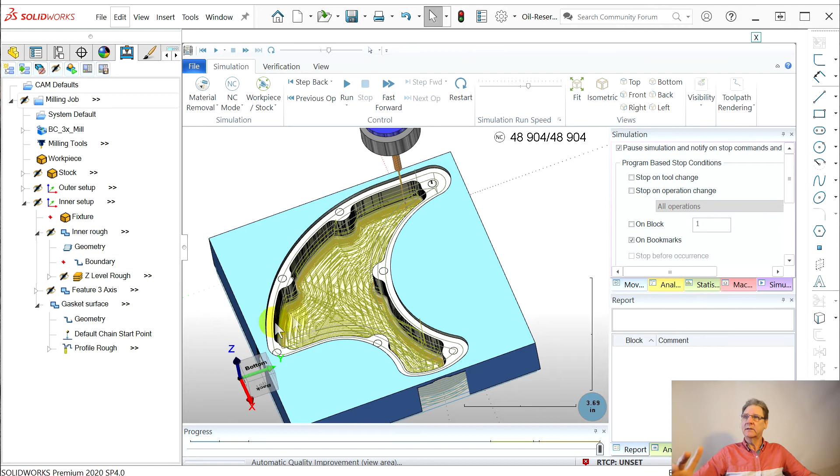I just lucked out, I think. See, because for a while, it was leaving a little slice of stock up here. And I had one that worked right, and then as I practiced, how come it's leaving a little slice? Very ridiculous. It was default chain start. Oh, see, just where I happened to click it, it's doing some kind of fast forwards. If the start point isn't here, it leaves a little sliver of material right here. So you could do smaller step overs and more of them to be sure to get everything. But I thought that was cute.

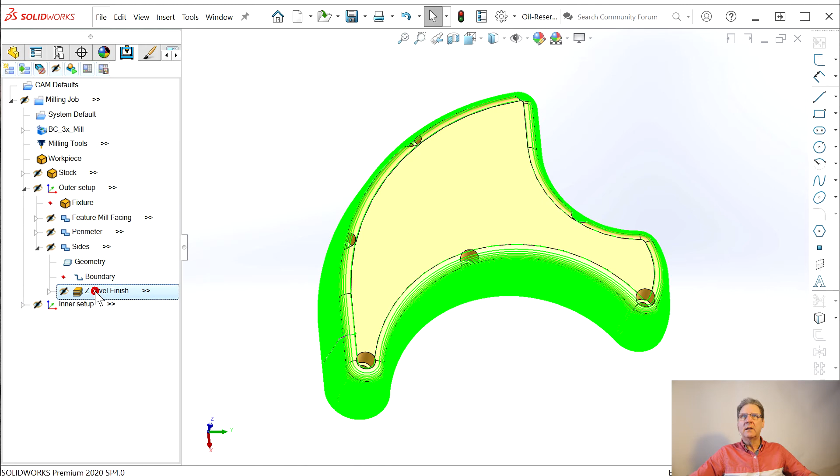Oh, see, I'm using the wrong buttons again because I'm used to the MasterCAM. Or I'm sorry, I'm used to the BobCAD way of doing mouse controls inside the simulator. All right, blank, blank. What do we want to do now? Did I get on this outer setup, is that roughing sides? Yeah, so don't recalculate now or it'll put those holes in. So what did I want to do? We've faced it, we've done the perimeter.

I figured right now, add a drill. Now I tried the counter bore, which is what these are, and it just gets confused. What worked out the best was add a drill. What's it want? Geometry. Flip this around. SolidCAM remembers how you pick them, and it does the machining in that order. I thought that was pretty civilized. At least I'm pretty sure it does. It seemed to work like that. MasterCAM, this program, they decide, although this program seems to have a more... Okay, so there you pick the 5 holes or whatever they are. Here they are. It's got the right diameter, 281.

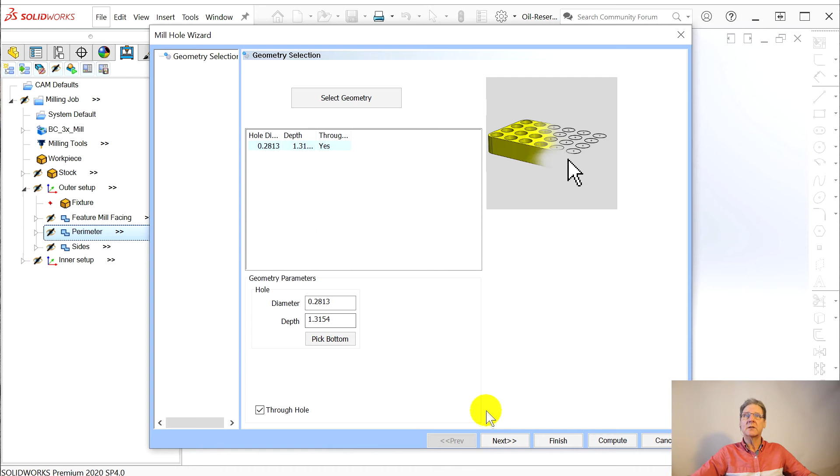Pick the bottom. We don't want to go into our table, so let's go there. And BobCAD is smart. It knows the tip of the drill has to go a little further than this. So to them, depth is the same way SolidWorks does depth: the corner of the drill, where the cone of the tip starts. Next. I don't even know where I'm at. Feature, next. Strategies, here we are. Center drill. Then I want to drill.

And then the only way I found to do it, you see, it won't let me select the counter boring tool. Because, oh, you're in the drilling, not the counter boring. Pretty exasperating. I assume there's a way you could fool it. Just don't, but the simulator won't simulate properly. So now when I click next, you'll see all these operations show up here instead of the center drill. Next, next, work offset, center drill.

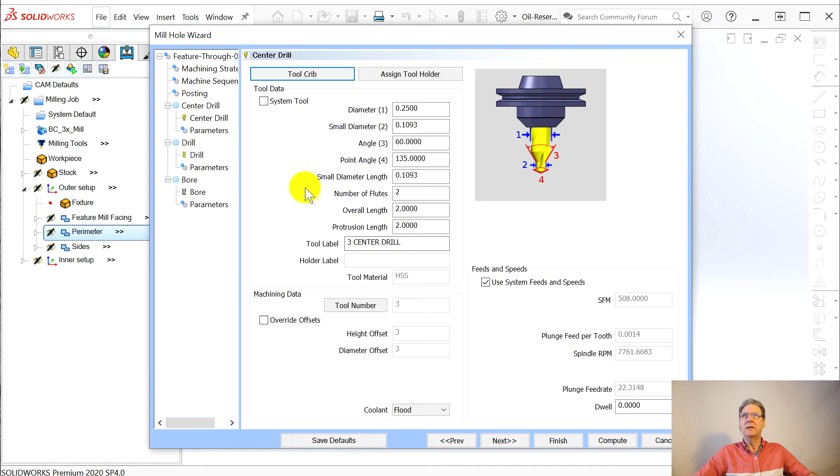I don't like this big diameter center drill with a funny collet size, so I go here and add from tool library, and there's a 1/4 inch diameter center drill here. I say okay, I say okay. Now it's got the same collet as the 1/4 inch ball mill. I say next. They only want to go 80 thousandths. I don't know why. I like 2/10. Goes a little deeper. Next. Okay, now we're in the drill. The drill's all cool. Was there a way to do peck here? Peck drilling. We'll leave its default.

See, it's smart enough to know it's got to go down 144 to get this corner down flat with the part. You can say, well, rather than that, let's go 50 thousandths more. Will I be into the table? Well, not 50, if I go 1.5 overall depth. And watch this change. See? This is where it's a computer. Thanks for helping me. Then do next, the boring mill.

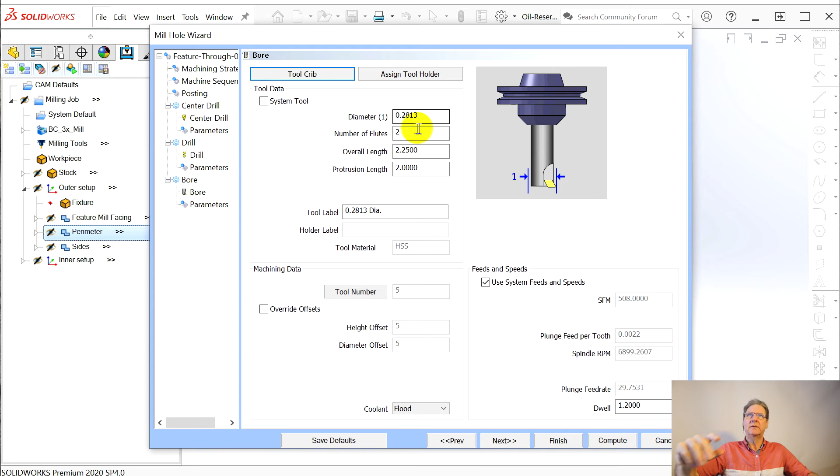Don't use the system data. See, it's trying to make a bore the size of that hole. I happen to know those counter bores are 0.44. I know because of the counter bore thing. Then next, and then don't do this. And because it's a square bottom tool, you can go 0.5, enter. Since the tool doesn't have a tip, it's a boring tool. I don't know what this is. 1, 2, 3. Okay, good to know. Well, we're done. Compute. There they are.

Then, let's see. So the feature is done after the perimeter, but what screwed me up, you got to go to machining order and make sure it's doing stuff in there. See, it's doing the sides first, and I don't want that. So push the sides down under the holes. So now it's going to face the outside. It's going to do that deep cut. Then while it's all flat on the top, it'll do these holes. Then it'll do the ball mill on the sides and do all the breakouts and all that bad stuff.

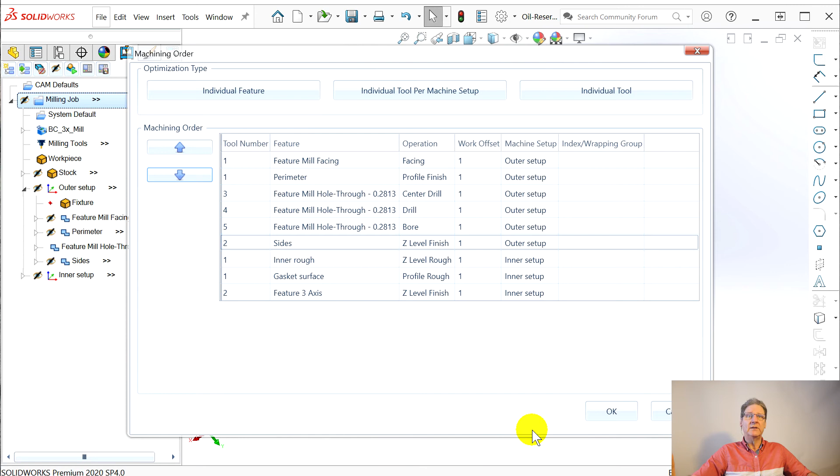Now this is the bottom setup, inner rough. So it's trying to guess, but same tool, 3, 4, 5, and 2. So it really is kind of arbitrary. I guess it's just saying, well, I'll do tool number 2 after tool number 1. So if I define these tools in the right order, I might not have had to do that. But since this is one of these feature things, the way CamWorks does it, you're always fighting. File, save, the part's done. 50, it's going to be under an hour, so that's good.

So, I'm getting so spaced out. Here. And with 8 minutes until a full hour show, we'll actually draw it. And I think there's going to be that one gouge or that one tool crash that I'll have to figure out on my own time. Don't look at the toolpaths. Keep it pretty darn fast. Let's go run. It's doing the facing.

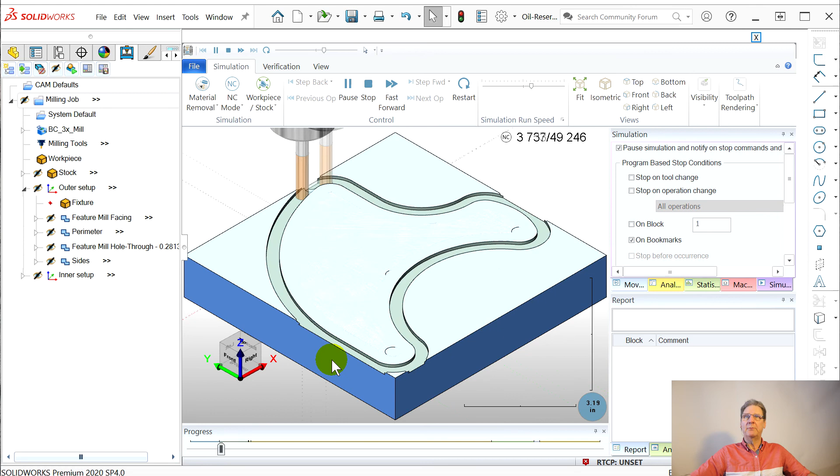Next we're going to do that perimeter, real deep. Now it should be doing the holes. Bam, bam, bam. Now it's doing the sides. And you'll see, I think actually half an inch down is not quite enough.

And see, this is level, this area here is level, same, up here. That's all level with the bottom of the part, because that's how deep we had that perimeter cut go. So you'll see the tip of the ball mill gouge into that on purpose. That's what we want, so that the corner of the ball mill gets down to this corner here on the surface. Here we come there.

See, it's starting to dig in. And we've got it. But we've left a little meat down here to hold everything together. It'd be interesting to see how flexible all this is when you pick it up to flip it over in the vise. Oh, I'm sorry. I'm not showing you. It's doing its thing. There's the roughing finish up.

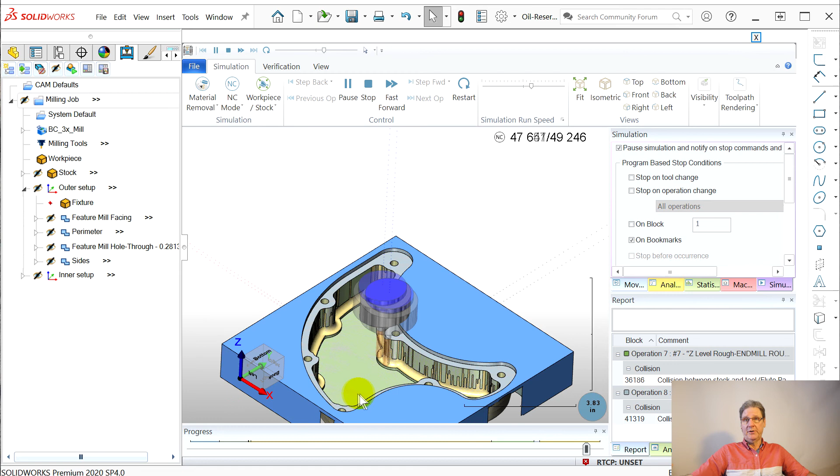Oh, there's a mistake. It cut the part free before it's doing this. Because, see, it's the same 3/8. It's trying to help you. Well, you got that 3/8 end mill. I'm going to cluster those together. And this is why you always want to run this. Probably slow. What just happened?

Okay, I'm never sure what's going on. File, save. What did we do wrong? Yeah, we know. Milling job, machining order. Now we go down here. We want gasket surface last. Okay. And now we can simulate one more time. 54 minutes into this show.

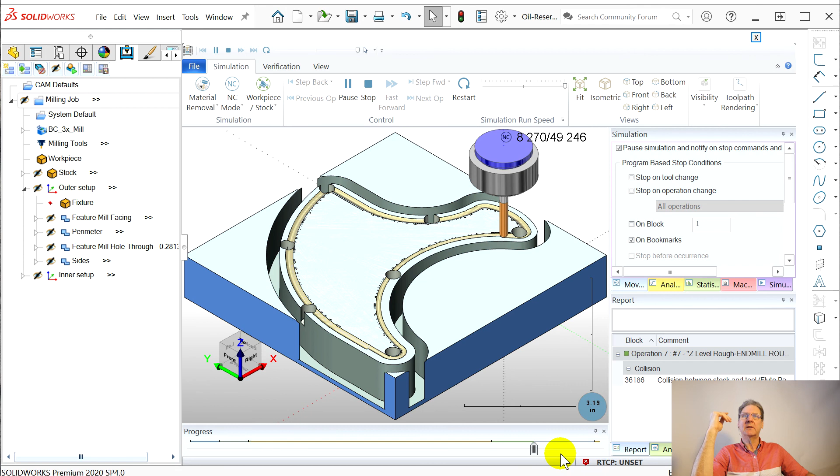The time for this simulator, it seems like I'm waiting a long time. I'll have to go look at other companies, SolidCAM, and visibility off. Just go to the end. It's doing its thing. See the slider here, and now it's done. I think it's done. It's still thinking, right? It won't move. Come on.

And it might look like it's attached, but it really isn't. You won't see because it's mathematics, right? Is there a breakout area? No, you really can't see. If we even went a thousandth over, we'd be cutting that part. You'd see a gap once we got down into the ball, right? But trust me, the part, when it goes around and does this last profile, the part is cut free.

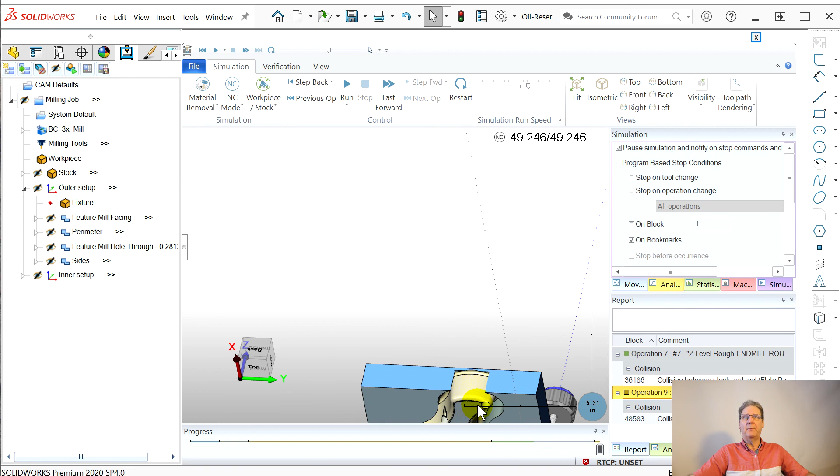And that was my thinking about not just doing a pocket here and leaving meat here. Why face that at first was my thinking. Well, if you just face the pocket area with a pocket operation, then as you cut this thing loose up here, the part will drop down 50 thousandths, right? That's not good. So I figured now it's flush.

The other trick I've seen machinists use, you put double face tape on it here and then flop it over. And it's amazing how well double face tape will hold things. But it's not like it's in between in a slot. So 55 minutes and 58 seconds according to the clock on the wall. File, save. It's a demo.

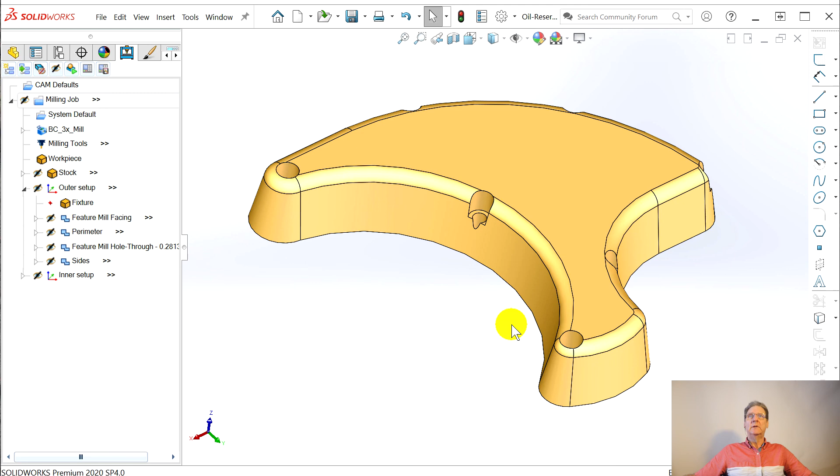Okay, so that's 3D BobCAD-CAM. It can get expensive, right? It's mid-range, $5K price, a little more, a little less, depends on the deal you can work out. I'm done with BobCAD. I'm going to go maybe back and look at fixtures in VisualMill and maybe some of the 3D stuff. They came, I think, from the 3D world doing router stuff and carving eagles and wooden platforms. So we'll see how they do.

And then the thing I didn't realize till my machinist buddy, Dave, who made that test part, said what about HSMWorks? I said, well, they're Autodesk, and I hate Autodesk. I hate them because I had AutoCAD 10, 11, 12, 13, and 14, and I had the AME that they abandoned. He said, well, no, HSMWorks is owned by Autodesk, but it was I think a Danish company. It's not a gold partner. That's how I missed it, but it works completely inside SolidWorks.

Subscription, $60 a month, maybe $400 a year or 500 a year. Compared to 5,000 up front, that might make sense. So we're going to download that, either get a demo or maybe just buy it because they give you a 30-day money back. That'll be next.